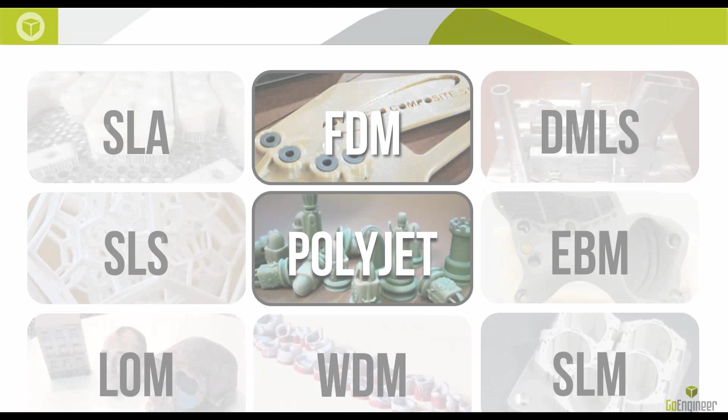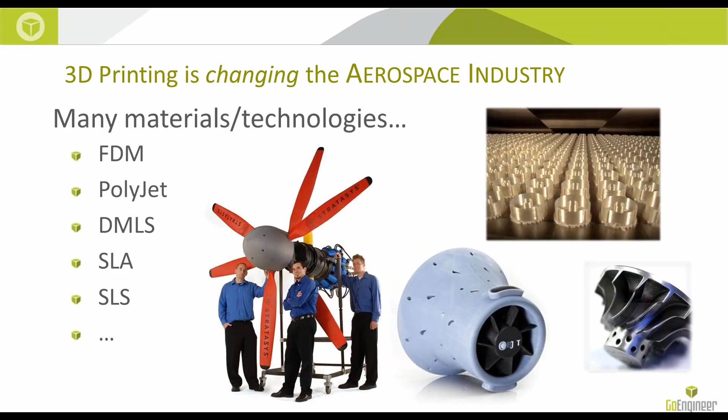I think I'll go ahead and get started here. I first want to make clear that there are a lot of technologies here that we talk about with 3D printing, or additive manufacturing as we now like to refer to it. And the point I want to make is, no matter what they are, FDM, PolyJet, DMLS, SLS, these are probably the ones you'll hear most when it comes to 3D printing or additive manufacturing in aerospace. No matter what technology or material we're talking about, we're changing the aerospace industry together.

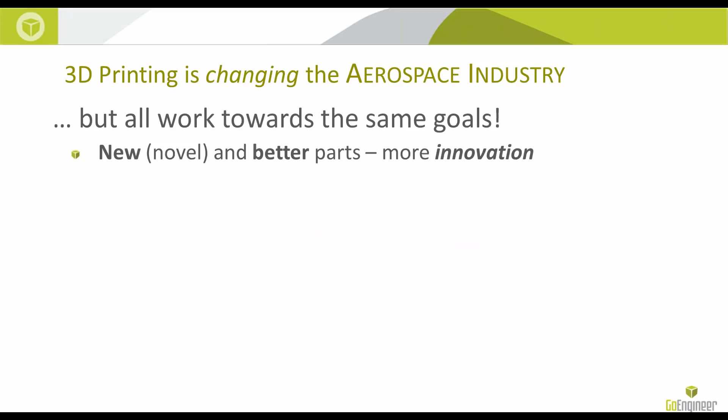Everyone's working towards the same goal, and that's new parts, more novel parts, novel ideas, better parts, more innovation. So how we get there, the drivers for that are these reduced cycle times, both in design, as far as designing for additive manufacturing, and then 3D printing, as far as using 3D printing as a prototyping tool. Also, what's a little less clear if you're not really in the industry as a manufacturing engineer, is we actually have a lot of ways that we use 3D printing on the manufacturing side to help us not only do prototyping and design iterations, but also reduce the time to market, which is crucial when you're spending the types of money that aerospace companies spend to develop these parts.

So what we're really delivering here with 3D printing or additive is reduced risk and cost. And that's at each stage. That's at the design stage, which I think is what most people are pretty familiar with. At the manufacturing stage, which we have presentations for, it's really exciting, the applications that we have within manufacturing and within aerospace manufacturing in particular.

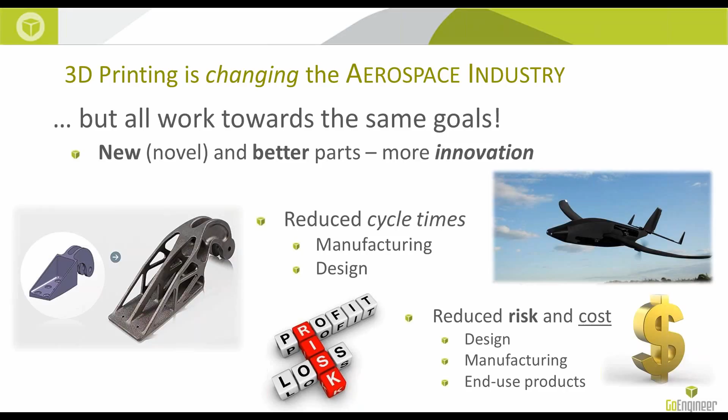And then end-use products. I don't know if everyone on the webinar knows this, but there are a lot of end-use parts flying today that are 3D printed. So beyond the manufacturing applications of using 3D printing to get your real, quote, real parts off sooner, we have a lot of companies that are using 3D printing to actually make their end-use products in aerospace. So that's really the exciting part for us.

So this is a layup. Airbus announced that they're flying over 1,000 Ultem 9085 parts. So I promise this isn't going to be a data dump with printers and materials and all that. But if there's one trade name to get out of this with Stratasys 3D printing, it's Ultem. In aerospace, Ultem 9085 gives us a great strength-to-weight ratio.

And it's the only 3D printed material that's FAA and UL and a few others FST certified. So that's flameless, smokeless, low toxicity. It's great if you can produce lightweight, very strong parts within an aircraft, but in the event that they ignite, you kill everyone on board—nobody's very interested in that. So aerospace companies have very stringent requirements for what can actually be flown, and then they have even more stringent requirements for what can be flown with passengers.

So Airbus has certified this material and their printing process, and we're going to talk about certifying additive parts in a little bit here. But they've certified this material and this process to fly in their end-use airplane as delivered to the airlines. So this is the A350. You may have seen some metal stuff from the A380. Airbus is really one of the few on the cutting edge of using additive.

So the real reasons why this makes sense, beyond a 'hey, this is cool,' is a streamlined supply chain. So they're actually using Stratasys to produce these parts for them. Stratasys being one of the largest 3D printer companies in the world, and the company that we sell printers for, they're actually using Stratasys to print these parts in addition to printing them themselves.

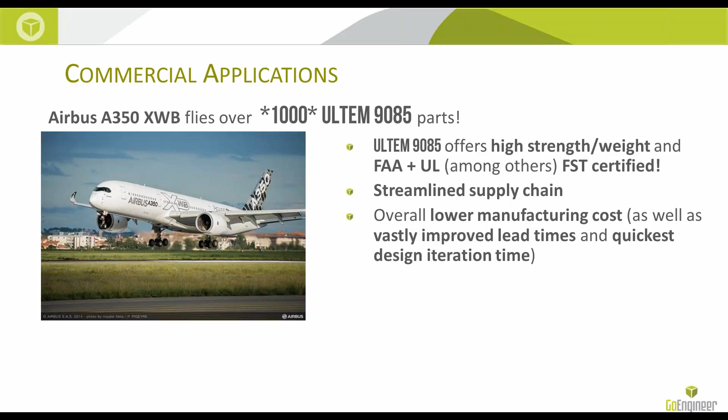So what that means is we have a lower overall manufacturing cost, and that's, if you're wearing a tie right now, if you're in an office with a window, that's probably what matters the most. Nobody would do it if it didn't result in less cost. And then of course you get these vastly improved lead times and the quickest design iteration time.

So what we're looking at here is one of the parts. This is a printed duct in Ultem for running through the top of the aircraft, and these have lots of configurations. So these are typically a real pain to make, and they have design requirements. This needs to flow a certain amount of gas through there.

So this is an example, and the real takeaway, if you're wearing a tie, if you're in a window office looking down at the parking lot, we're approaching a 1-to-1 buy-to-fly ratio with these parts. So when we talk supply chain management, buy-to-fly is how many parts the aerospace company has to buy for every one that they're able to, air quotes again, fly. 30-to-1 is not obscene. 100-to-1 is not obscene. So approaching 1-to-1 buy-to-fly, you need one, you buy one, they send it to you quickly, is the holy grail for all the aerospace Six Sigma guys and whatnot.

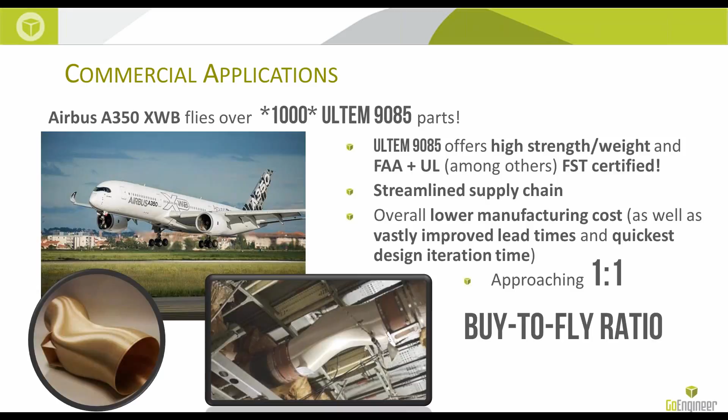So figure I'd start out with that one. This one's a little bit more obscure. You probably haven't seen a satellite, but Lockheed Space Systems recently also used Stratasys.

This is Stratasys Direct Manufacturing, using Stratasys' printers to prototype these fuel tanks. So these are the fuel tanks for an upcoming satellite. They're the largest prints Stratasys had ever done as of earlier this year when I pulled this, almost 7 feet by 4 feet by 4 feet. So we're looking at cylinders that are 4 feet in diameter. Those are not midgets standing behind them, and almost 7 feet long.

So Stratasys chopped these cylinders into sections, and they were able to mate them together suitably enough to do this fit test that they wanted to do. So they printed them in polycarbonate. In FDM, as with Ultem, polycarbonate is a great material. It's very strong, it's very impact resistant. So they used 6 Fortus 900s, which are the biggest printers that Stratasys has, 36 by 24 by 36 build envelope, to make these sections, and they did it with a low 5-digit cost.

So when we're talking aerospace or defense, we typically just talk orders of magnitude. Is this a 3-digit cost, like a couple hundred dollars? Is this a 4-digit cost, a couple thousand dollars? 5-digit cost, over $10,000 but less than $90,000 or so. So this is low 5-digit cost.

I want to say they did it in the teens, and traditionally... they got this back in 150 hours print time. Now they were running 6 machines simultaneously, so that's how they were able to do it that quickly. But we're talking a week, whereas traditional prototyping was estimated at 6 months and $250,000. So we're better than tenfold decrease in cost, increase in value, as well as getting it back instead of 6 months, 20 weeks, we're back inside a week. So this was a huge win for Lockheed Space Systems using Stratasys.

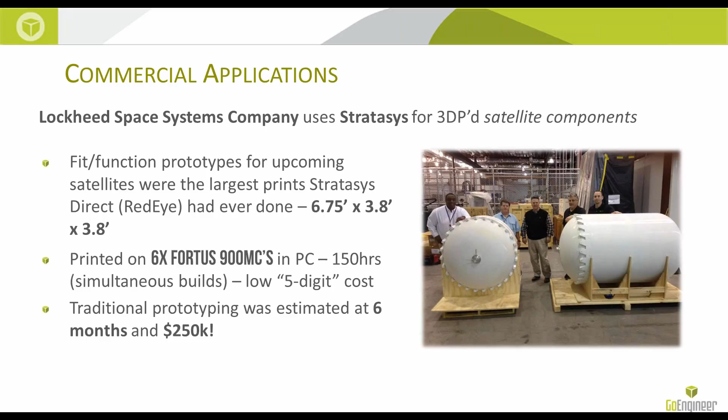We also have another related commercial application. So United Launch Alliance, this is a joint venture between Boeing and Lockheed. They make disposable launch vehicles. This is after the space shuttle went out of commission. This is pretty much what takes everything up. They are saving $1 million annually using Stratasys 3D printing. So it seems like a lot.

This is how they do it. They're mostly an integrations company. They have the IP, they do the integration, but they outsource between 60 and 75% of all of their production. So when you're outsourcing, there's a lot of... you do the design work, but that's really only the beginning of this part getting made. It has to go into a drawing, you have to shop it out, you have to look at bids. You have to actually try and get this stuff back from the person that bid on it, and then you have to do your inspection.

So there's this loop that may not have an end, and sometimes this gets very costly. They're saying over 50% cost reduction across the board on these printed parts, up to 95% cost reduction. And the reason they're able to hit these insane numbers is because they bought a couple of Fortus 900s to have in-house, so they're actually printing their own parts. They're decreasing the amount that gets outsourced, and like everything else, they're doing it faster for less money.

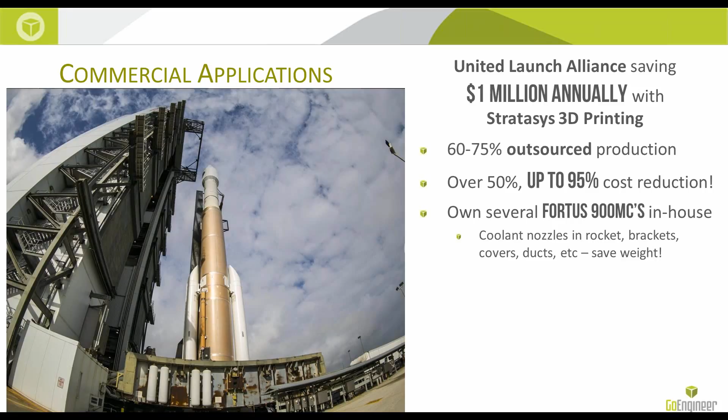So coolant nozzles in the rocket, brackets, covers, ducts. Currently they're not flying any people in these, but that's what they're certifying this year. So as of next year, we'll have manned flight with these printed parts in these Atlas V rockets. So again, most of them, what they're using is Ultem 9085.

If there's one thing you can remember from this in aerospace and 3D printing, Ultem 9085 is the jam.

So they've certified the material as well as the process, printing in-house on their Fortus 900s, so that there's no inspection needed. And this becomes a big part of the presentation in a few minutes here, but inspecting parts for aerospace is tedious. And with additive, it adds another element to that, because the parts might all come from the same material on the same printer, but if anything changed, the properties of the parts might change, meaning settings or orientation, what have you.

So they're saying this duct that you're looking at here, this duct goes around inside the cowling. It feeds cooling air through this very hot part due to aero heating. The outside of the cowling gets very hot. So this duct is printed in Ultem.

They can do their design iterations very fast. You're looking at the 3D scanner targets on that, where they were just doing a little CMM on this first one when they were certifying the process. That's where this picture comes from.

But they went from 140 aluminum pieces down to 16 printed sections in Ultem. That's how, if you picture the amount of time for each of those aluminum parts, as far as bidding it out, getting it back, inspecting it, that's how they get this insane cost reduction, because there's cost associated to every single one of those steps. So when you're using 3D printing to cut out not one, not two, but 8, 10 steps, huge cost reductions.

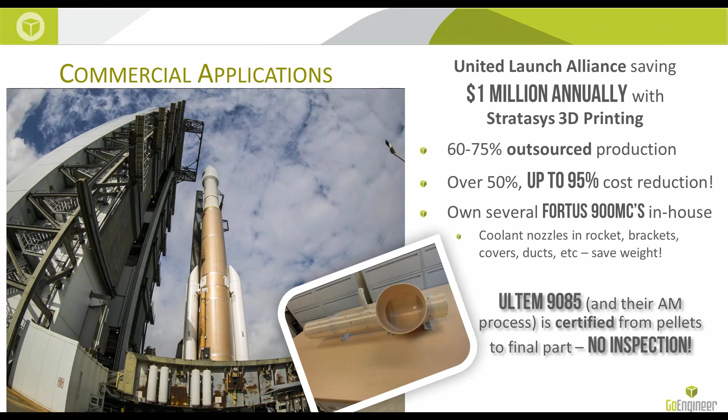So these were very straightforward, and this is the last one for our commercial side. Lockheed Space Systems, we were talking about this with those satellite fuel tanks. That was a plastic part. This is a metal part. They're talking about their metal printing, which they do in-house.

And this is a fairly large company, but they're saying 43% reduction in cycle time, 48% cost reduction. So this is again almost 50% cost reduction, even when you factor in the insane cost of the metal printers right now and the metal powder. Because you're wasting so little of that powder, the actual part cost, even when you amortize in the price of the machine, can be competitive. In this case, almost half of what they would have spent.

So they're saying for what they're doing for Lockheed Space Systems, it is absolutely the future of 3D printing. But my point is, regardless of the company or what their end product is, you're seeing all of these commercial companies saving money, saving time. And that's what's changing the industry for the better—the fact that everyone is in step here, moving towards additive manufacturing.

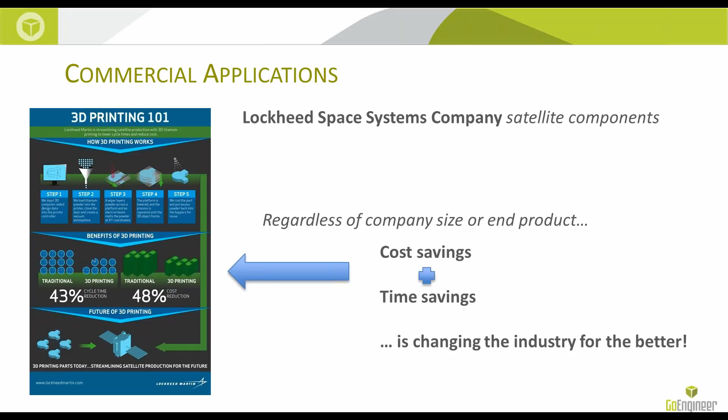So we talked about inspection. NASA has a new NDE working group—this is non-destructive evaluation, non-destructive testing, you might have heard. But this is traditionally done after a part comes back. You would do your NDE, and you want to just make sure that this part was made how you thought it was made. And traditionally that's done at the end, right? You're not going to stop a CNC machine halfway through a cut and say, hey, what are you cutting down there?

But with additive, that actually makes a ton of sense—you want to do it during the build if you can. So these are a couple of the current NDE methods now. Eddy current, where we put some current through and see how much current's required to keep that current going, and dye penetration, or dye pen. Neither of these work very well with additive manufacturing, and this is in relation to metal parts mostly, because of the rough surface.

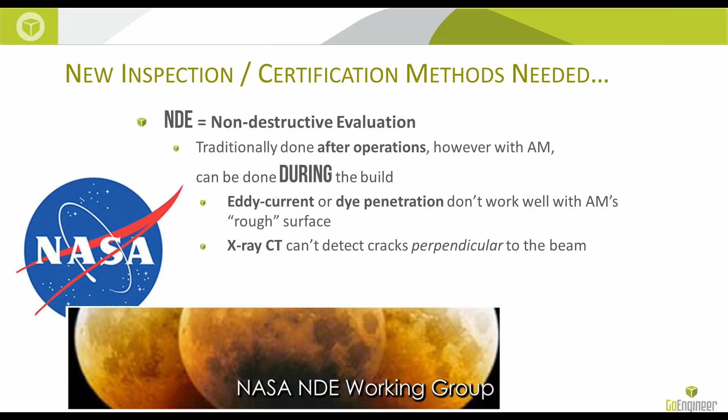Parts that come out of metal printers nowadays still require some post-processing, so you have to post-process it first before you can do either of those. X-ray CT is great, computed tomography, but it doesn't work when you're detecting cracks if they're perpendicular to the beam. If you're shooting down the length of a crack, you will not find it. There's some problems with that as well.

So this is Dr. Jess Waller, material scientist at NASA. They're saying that they will come out with the standard for inspecting additive manufacturing parts. So it's kind of cool to see NASA taking the lead on this. It seems like it's been a while since we've seen anything like that.

So they're saying it's a unique opportunity with additive, and that's because we can do this layer by layer. This doesn't just apply to metal parts, but that's where the big industry push is right now, in certifying these metal parts, like Lockheed said, which are 50% cheaper. So doing this layer-by-layer inspection is what they're trying to hit.

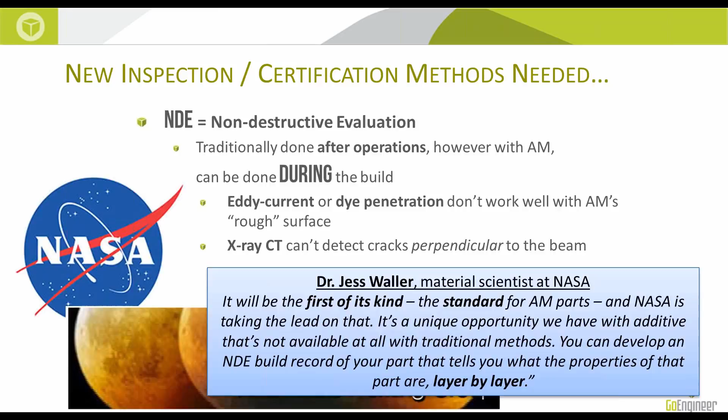So that's the NASA NDE. Now, this kind of goes towards that as well. Earlier this year, two $1 million plus contracts were awarded to 3D printing companies. The first is to integrate predictive technology to dynamically monitor these parts layer by layer. And so right now, there are some people playing around with...

Taking video, using visual light to take a look at these parts as they're coming together. But all you're doing essentially is strapping a camera to it, and you might not be able to see what's actually happening as these parts are being sintered, for instance. So they're trying to come up with predictive technology, and that's led by 3D Systems, but also you'll notice Sandia National Labs, Lockheed. These are big names all over 3D printing right now for producing and investigating these technologies.

And then the other one would be the Applied Research Lab at Penn State, along with Honeywell and Northrop, developing fully dense, chemically pure, flight-worthy metal parts. So this is the internal structures of some of these parts. They say they're fully dense. They may be, they may not be.

There's kind of, depending on the technology, DMLS versus EBM, there are a bunch of metal printing technologies that may or may not be fully dense. So this was another $1 million plus, 7-figure contract awarded to feel that out, to see if they can create chemically pure flight-worthy parts. And that would eliminate some of that inspection at the end if you could prove that your method did create those. So that's the real driver here, is we're trying to eliminate that inspection at the end.

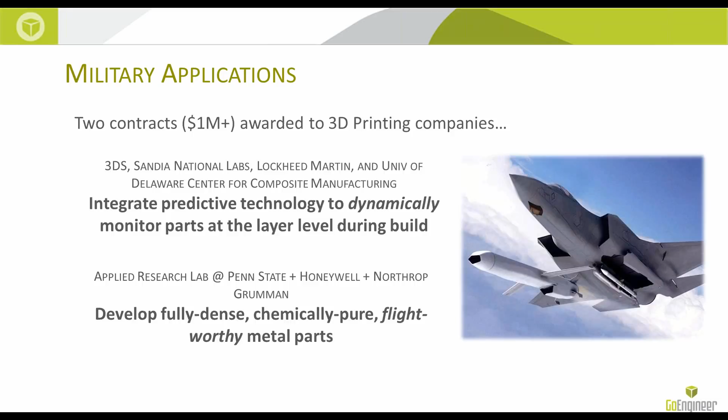So along the military and defense side, even though this is kind of commercial, kind of not, it's government dollars. So America Makes, very, very cool, fairly new, last couple years, a group, and it's part of the National Center for Defense Manufacturing and Machining. So this is a government group that is trying to help all of the subcontractors that the government uses to manufacture and machine. This was their third project call.

First one, Seamless AM Design and Analysis. This is led by Raytheon, GE, Altair, Ansys, Autodesk, Netfabb. These are huge names in 3D printing and CAD right now. Designing new design tools for additive manufacturing. Most of this has to do with metal, some of it with plastic.

Creating an open architecture for third-party metal. That's going to bring the cost down. They're really looking at bringing the cost down to bring implementation up, and creating an open architecture for the third-party metal suppliers to supply and validate that metal. It needs to be, for aerospace, traced back all the way to the piece of wrought that it came from. So what do we do for powder? Nobody knows. So GE and Rensselaer Polytechnic are looking into that.

Digital threading for additive. So this is basically threading operations. You might have heard of it with computer chips, hyper-threading and whatnot. They're really trying to get higher throughput because these machines are very expensive. And if you can only get one part off per day, and your machine is costing you a few thousand dollars a day, that part becomes very expensive.

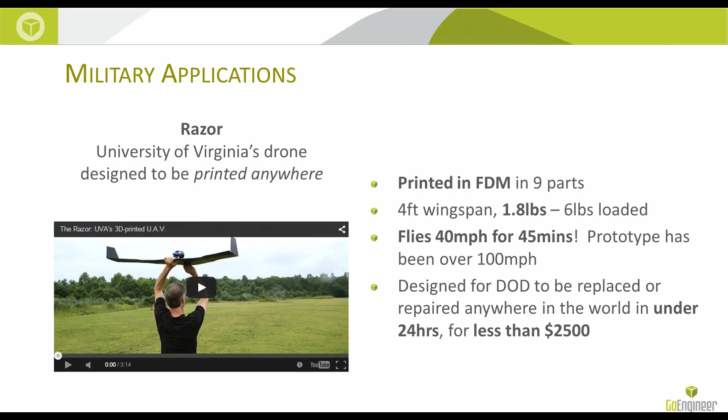This is designed for the DoD to be replaced or repaired anywhere in the world, in under 24 hours for less than $2,500. You fly one of these things and crash it — the field team at your forward operations base, or on a ship somewhere, littoral craft — can repair or replace the entire drone in under 24 hours for less than $2,500, making these expendable. That's the next huge tipping point for these drones: how do we make them cost a little less so we can use them a lot more?

Along those same lines, Raytheon says they can now virtually print guided missiles. They've printed every single component individually. Their goal is to print them on demand in the field, meaning you don't have to take a load of ordnance with you. You have a printer at your forward operations base — you need a specific guided bomb, you need a specific missile, you print it. So the real motivators for that: you can design the internal features.

This is coming from one of their additive manufacturing engineers — everyone already knows this, right? You can design features that are impossible to otherwise machine, and they're trying new designs. So thermal improvement, lightweight structures — these are big. There's a lot of weight that goes onto ordnance just to protect the rest of it inside. What if you didn't have to have that? You'd be lighter, which means you can pack a bigger punch or fly further.

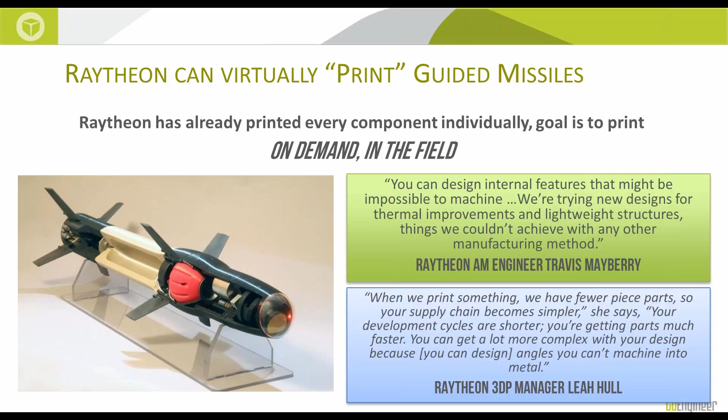Their 3D print manager brings it back to some of the commercial applications we're looking at: when you print it, there's less parts, your supply chain is simpler — meaning even if your supply chain had 10 steps, you're now doing 10 steps for 5 parts instead of 15. But what if it didn't? What if you actually had less parts and they were simpler themselves, so your 5-step process has 3 steps? Your development cycles are shorter, you're getting your parts faster, and your parts are already more complex. This is the goal — this is why they're looking into this.

So I blew through that to make sure we covered it. I put a lot of material in there, and I guess I left myself some time for questions.

GoEngineer, as a reseller for Stratasys printers, is looking to provide design and manufacturing tools with our expertise in these applications, enabling you, the customers, to reduce the cost, risk, and time required to go live. So again, cost, risk, and time. We know your engineering teams are expensive, and 3D printing, especially in the aerospace field, is pushing that forward faster.

So I'm going to open this up. I apologize, I only have one screen today. I want to take a look at questions.

All right, looks like we had one question. Anybody else have questions? I know we covered a little bit about materials—I didn't want to get hung up with a data dump on materials. We covered a couple of applications and who's using it; I know we had some attendees from a couple of those places. So I wanted to open it up here to questions. Let me pop this out. You guys can type these in the chat. I've got some help looking at these questions, hopefully I won't miss anything.